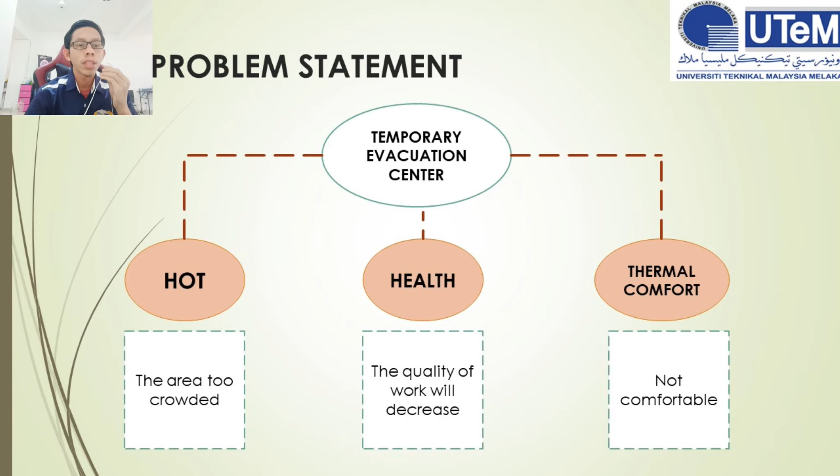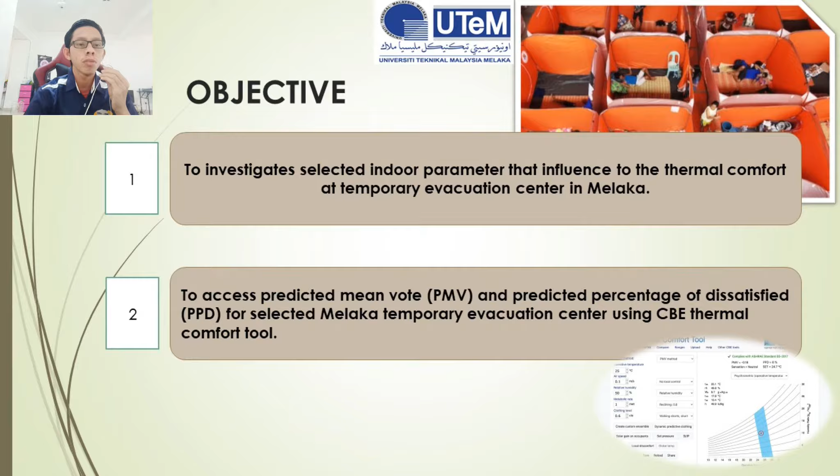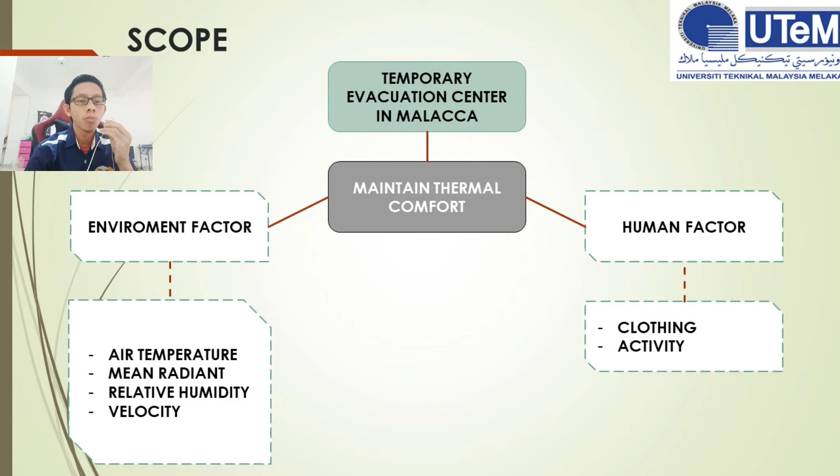For my scope, this research will be conducted at selected temporary evacuation centers in Melaka. I will define the factors to maintain thermal comfort at the evacuation center. For environmental factors: air temperature, mean radiant temperature, relative humidity, and air velocity. For human factors: clothing and activity.

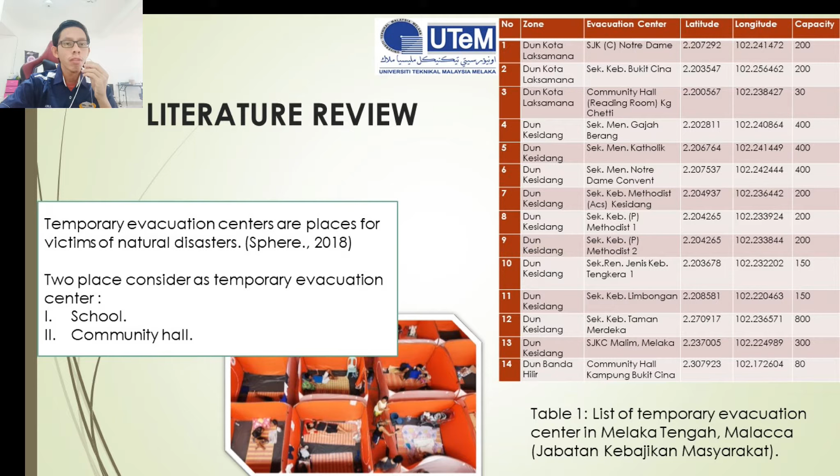Based on table 1, there is a list of evacuation centers in Melaka Tengah: 12 schools and 2 community halls. The capacity of each evacuation center is different because the area of each evacuation center is not the same.

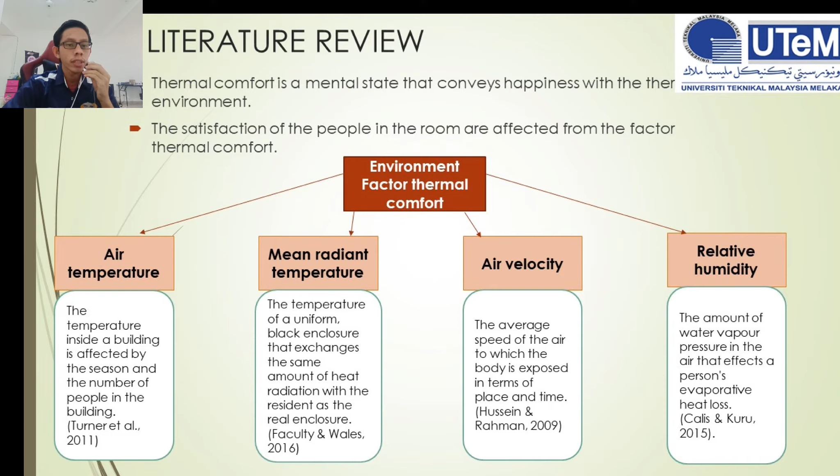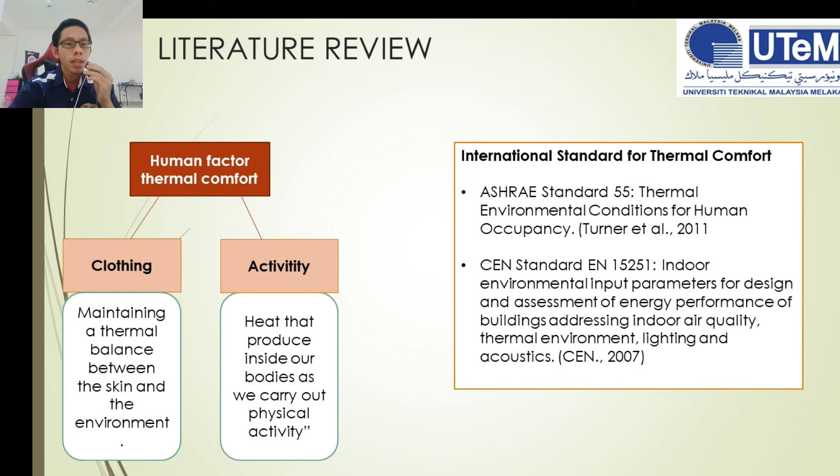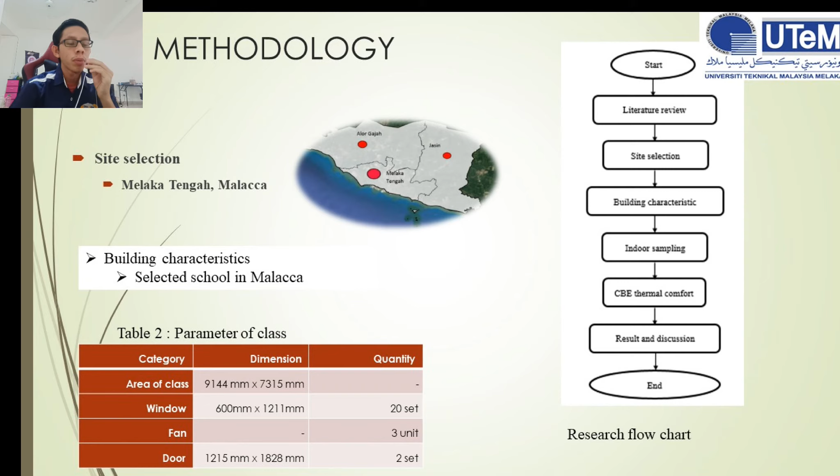For indoor sampling, I will take 4 parameters. The first is air temperature. For air temperature, I will use a thermometer, which will be put in the class.

Second is relative humidity, for which I will use a sling psychrometer to get the value. Next is air velocity, for which I will use an anemometer, placed in the class at several locations.

Next is mean radiant temperature, for which I will use a globe thermometer. For this data, I will take measurements at several heights, because the human body has several sensitive points at different heights.

This data will be taken from 10 AM to 4 PM, because that is the most critical time to observe the situation in the room. Data will be taken every 10 minutes, simply as a standard parameter that needs to be used.

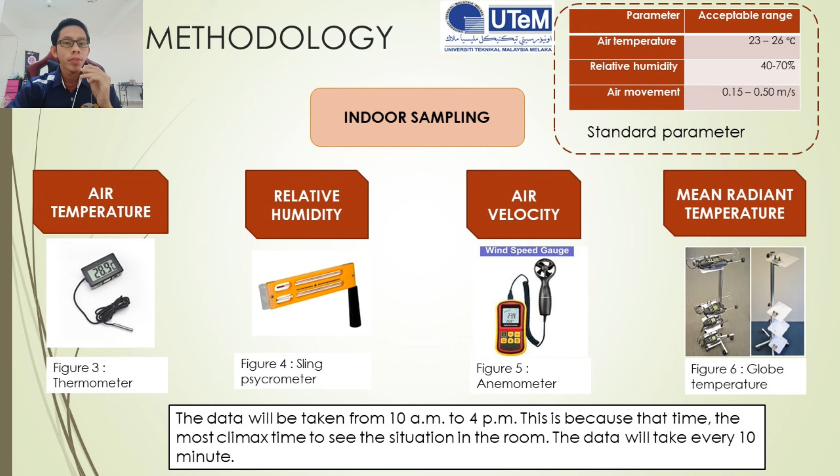For the first parameter, air temperature, the acceptable range is 23 to 26 degrees Celsius. For relative humidity, it can be set between 40% and 70%. For air movement or air velocity, the range is 0.15 meter per second to 0.50 meter per second.

Next slide is CBE Thermal Comfort Tool. We use this CBE tool to get the PMV and PPD parameters. First, I will insert the data.

I will select the method that we use, then insert the air temperature obtained from the sampling, then insert the value of air velocity, then insert the relative humidity data. After that, for metabolic rate, I will choose from the right column, which shows all the activities that can be selected.

Next is clothing level, which is also chosen the same way as metabolic rate, from the right column. There are many clothing level options, and I only choose the one depending on the situation.

Next is the graph, which shows the comfortable area. The blue color represents the comfortable area. The red dot shows whether the room is in the comfortable zone. When the red dot is outside the blue area, it means the room is not comfortable.

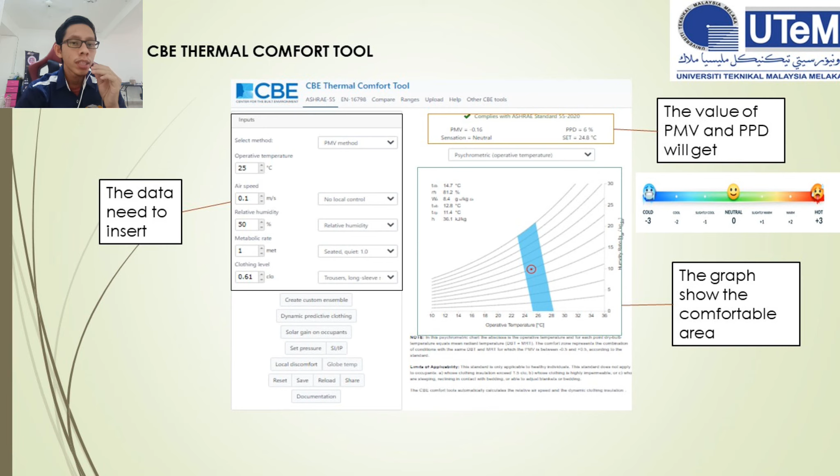If the PMV value is below 0, it means the room is in a cool condition. But if the PMV is above 0, it means the room is in a hot condition. The comfortable condition for the room is between -1 and 1. The PPD value depends on the PMV result.

This slide shows the expected result. Based on the research, the thermal comfort in the room will be comfortable. The values of PMV and PPD will be in the comfortable zone, and the data will be within the standard parameters.